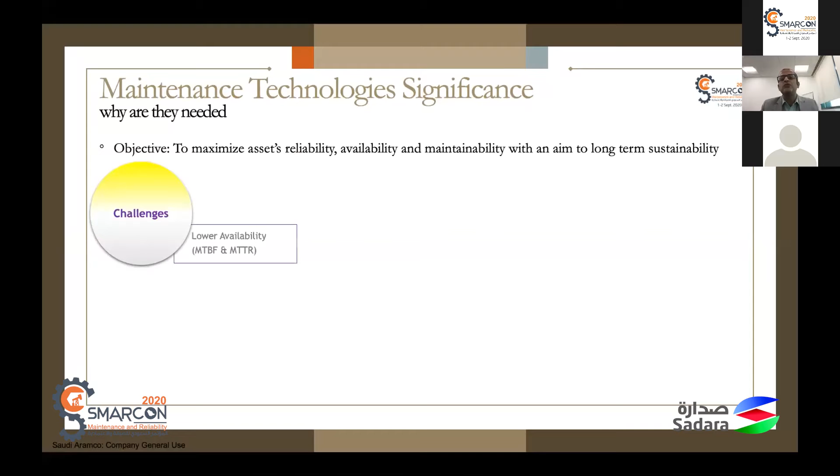That being said, what is the driver behind realizing that objective? We should think about the high-level challenges that can exist. There are plenty of maintenance challenges as we speak, but just to initiate our thought process, I have listed a few of the major challenges, however not limited to, as shown in the slide.

The challenges can include lower availability. Availability is a factor of mean time between failure and mean time to repair. In earlier presentations, Dr. Mishari and the presentation just before me, Mr. Nazi, specifically touched on the importance of MTBF and mean time to repair - closely connected with the response time Mr. Nazi was describing. Mean time between failure was beautifully explained by Dr. Mishari, an expert with more than 30 years of experience. Lower availability is one of the prime challenges when it comes to the significance of maintenance technologies deployment.

Higher maintenance expenditure is another prime factor that draws our attention - how to decrease maintenance expenditure as a challenge and pain point. When we talk about master data governance, yesterday one of our gentlemen discussed master data and taxonomy - how to keep record keeping and equipment history intact. That is also a pain point for many maintenance engineers like us. Last but not least, knowledge transfer and experience sharing is one of the pain points.

Dear team, I would like to share a figure. When we did a study recently within our own country, we found that almost more than 50% of the workforce is less than 30 years of age - meaning they have fewer years of experience - while the majority of the remaining chunk are aged 50 plus. When they are on the verge of retiring, there would be a big knowledge gap. This is a major challenge we are going to face in the near future.

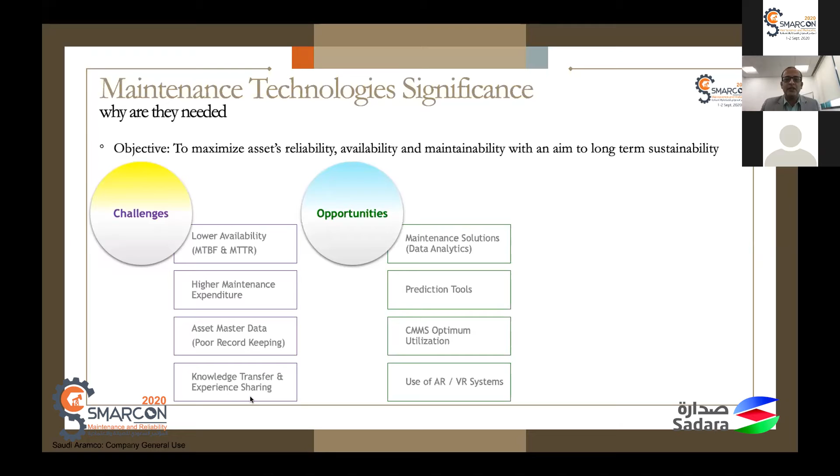The third opportunity can be optimum utilization of CMMS systems - for that matter, SAP, Infor, Maximo, etc. When we discussed the opportunity of CMMS utilization, another opportunity is utilization of augmented reality and virtual reality systems. This AR and VR system is a perfect epitome of success when it comes to mitigating knowledge transfer and experience sharing.

After giving thought to the challenges and available opportunities, our focus moves into scope and focus areas where we can adopt those maintenance technologies. First and foremost can be maintenance reliability tools and systems - it can be T&I optimization technologies, turnarounds, asset management systems, predictive analytic tools, failure diagnostic tools, and last but not least, knowledge transfer and data management systems.

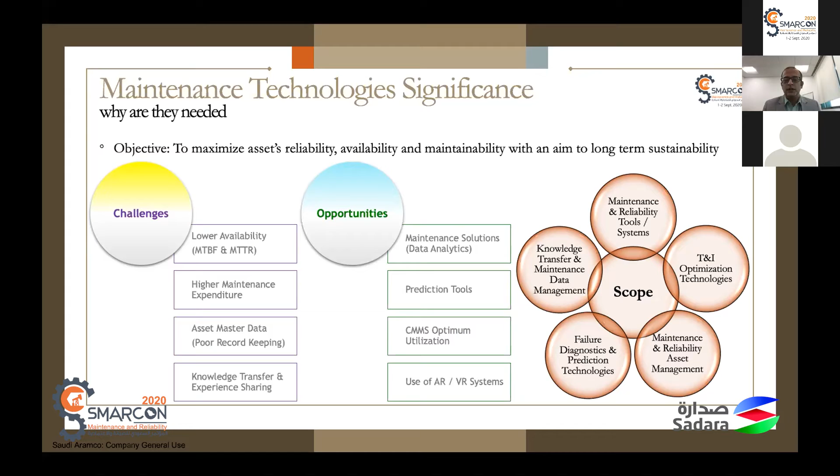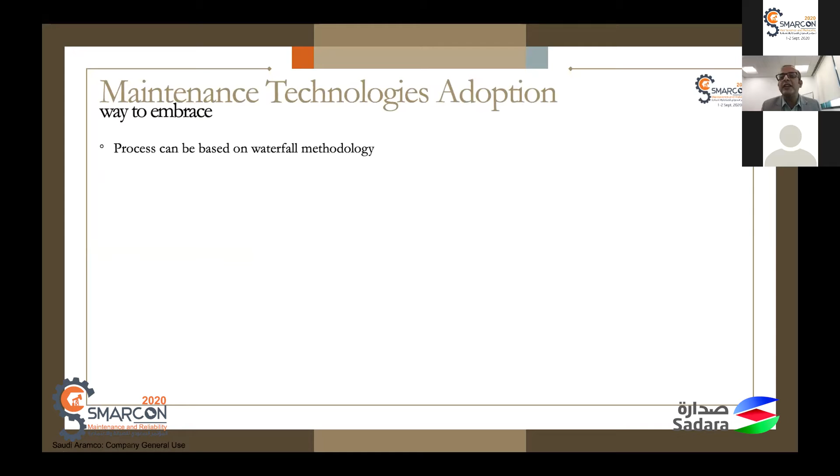After we have come up with the scope of areas, we need to know the ways we have to embrace which can lead to maintenance technologies adoption. The process can be based on waterfall methodology. The first step would be identification of the maintenance challenge.

Once we have identified the challenge, we need to scout for solutions. Solutions can be anything: a cultural improvement step, a best practice improvement, or technology can also be a mitigation measure to address that particular challenge.

Once we come across a particular technology as a solution, we need to do a pilot or proof of concept, to check whether the applicability is correct and we are getting the correct ROI. Once the pilot is successful, we need to adopt it as a long-term strategy, that is, it has to be deployed further.

With this process, based on waterfall methodology, we are sure that we are going to increase our productivity, enhance reliability, improve profitability, and last but not least, safety would be there in all these steps taken forward.

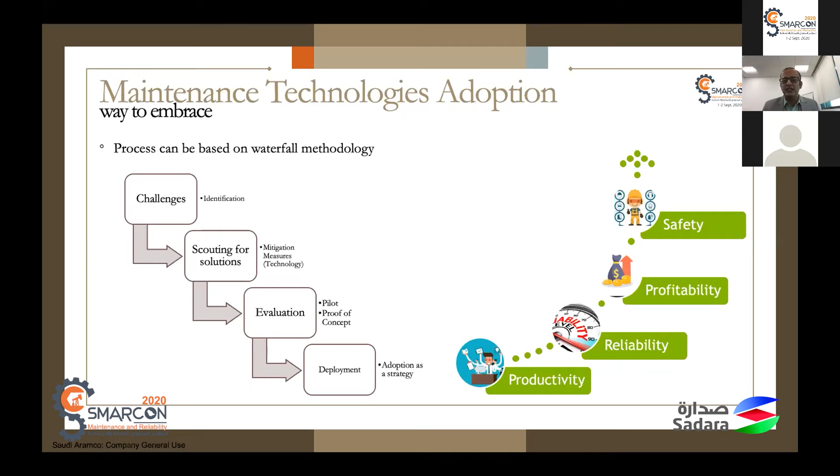Building on this, for an example, we have taken a rotating machinery, say a pump. What can be the challenges, so that we can start the thinking? Challenges can be many. As a high level challenge, it can be a reliability issue: lower equipment availability, lower mean time between failure, higher mean time to repair, and so forth.

Another maintenance challenge can be high maintenance expenditure, due to high MTTR or reactive maintenance. On a high level, knowledge gaps can also be a challenge: operational issues, maintainability issues, experience sharing issues. So these are the high level challenges, say for a pump.

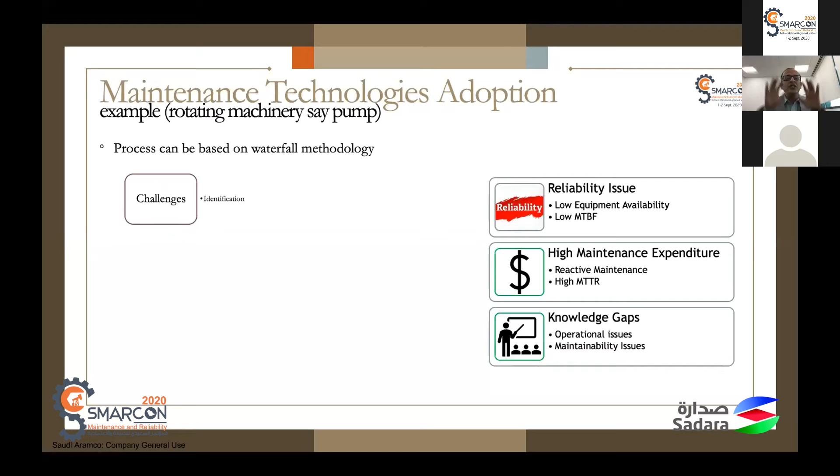How do we go about mitigating this challenge? There can be a number of solutions: it can be a maintenance technology, operational and maintenance best practices, or culture improvement. If we see a maintenance technology as a mitigation method, we need to evaluate, pilot or proof of concept, and then deploy it. Deployment means we are adopting it as a long-term strategy.

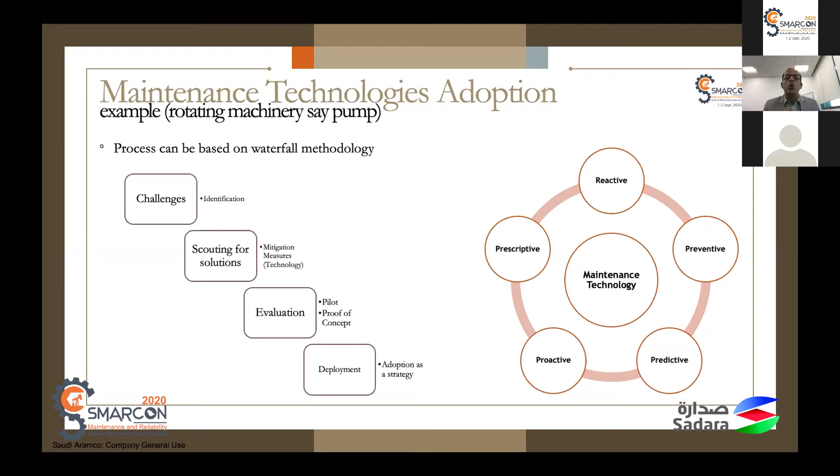Those maintenance technologies can be formed under 5 different types. When we talk about these 5 maintenance technologies, I mean the classification we broadly use, however not limited to, this is a very high level classification.

The primary classification is driven based on the industrial revolution stages. We started with industrial revolution 1, which was a steam driven engine. So from IR 1.0, we are today at IR 4.0. The primary classification is into 5 types of maintenance approaches. The first approach was very primitive, which is the reactive maintenance approach.

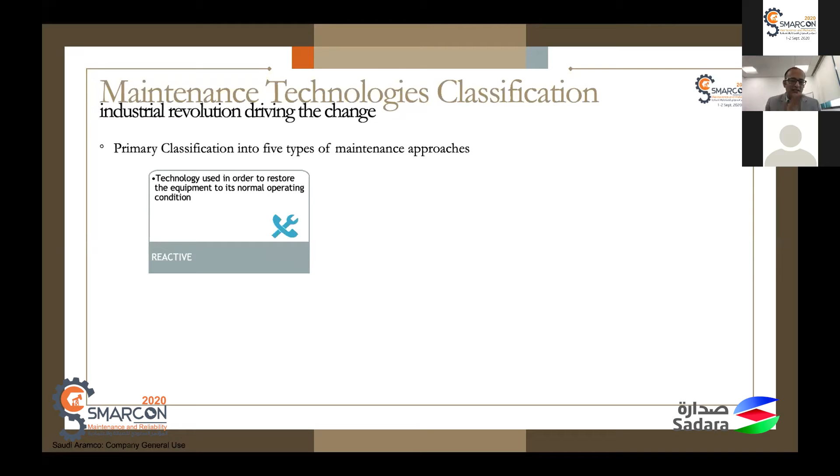Reactive technology can be considered as a tool used in order to restore the equipment into its normal operating condition. That is to say, equipment has gone into breakdown, and we are applying that tool or system or technology to restore it to its normal operating conditions.

The second classification type after reactive comes preventive. That being said, preventive technology or system means it is being used to maintain that equipment while the equipment is in a working condition.

I would like to share an important finding according to a study by the Office of Energy Efficiency and Renewable Energy organization: 12 to 18% of savings over reactive strategy can be achieved if we are managing our preventive technologies effectively. Such a huge impact of preventive maintenance. So we have gone from reactive approach to preventive approach. However, in later slides I will tell you we should have the right mix, but first of all, this approach has shifted now from reactive to preventive.

The next approach, I would like you to guess, is the predictive approach. Predictive approach or predictive technology can be a technique to predict a future failure point. I would like to take your attention towards the potential failure curve, called the PF curve. The PF curve has a point where failure starts, a kickstart point, and then after a certain time elapses, the equipment fails. So if we come to know with some predictive technique about the failure point that has started, we can elongate the time between the failure start point and the actual failure of that equipment.

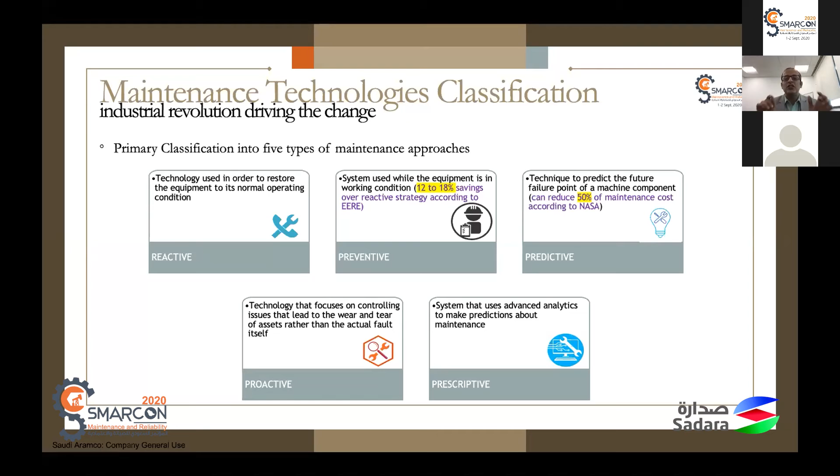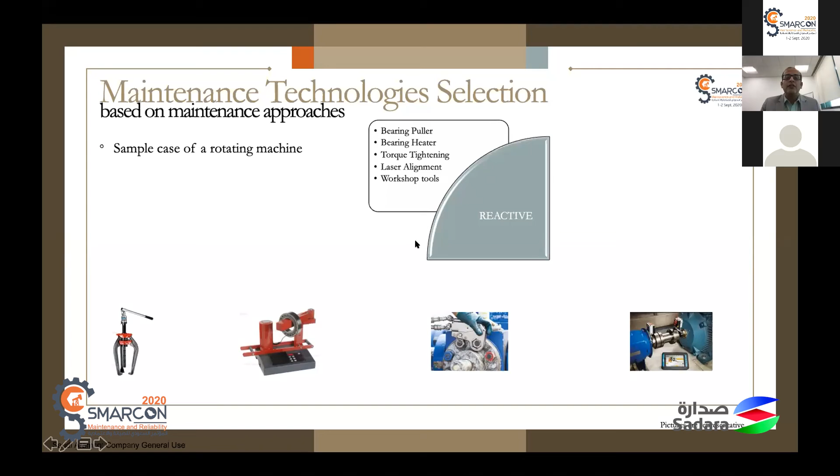We go into the second step: preventive or predictive maintenance. It can be use of thermography, IR, vibration monitoring, noise detection, acoustic cleaning. These are predictive or preventive maintenance technologies. We go further, deep diving into proactive maintenance technologies. As we saw in the previous slide, it can be asset performance management, comprehensive lubrication analysis, FRACAS, RCM technique, which can be part of proactive maintenance technologies.

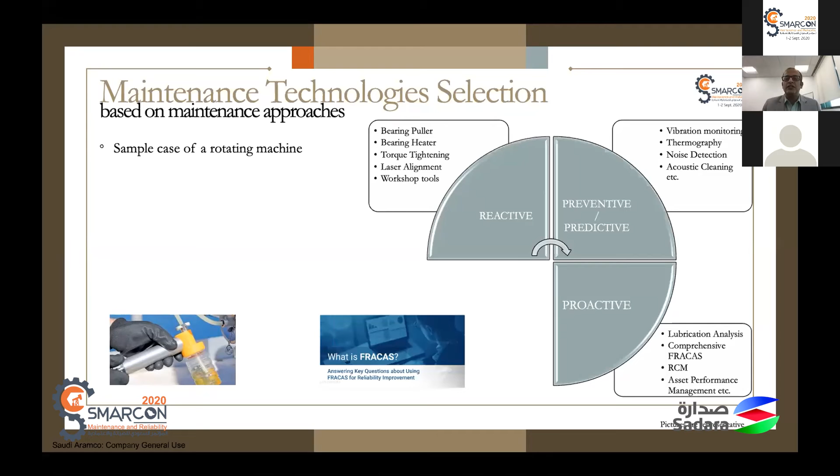As we speak about prescriptive maintenance technology, which fits very pertinently into the IR 4.0 theme, our digital transformation era, we have so many techniques for data analytics. Name it and we have it: machine learning, cloud computing, big data, use of augmented reality, mixed reality, virtual reality systems. I, as a maintenance professional, would like to give you a heads up about what techniques we can use as maintenance technology.

Using RPA, that is robotic process automation, or chatbots, this is going to reduce the time spent on repetitive maintenance activities. Use of operational analytics, developed utilizing DevOps, mobility apps, to optimize our maintenance processes. One aspect is use of robots, UAVs.

Additive manufacturing is one of the key elements coming very soon, utilizing 3D printing for spares management. I still remember in my career of 15 years, my boss used to tell me the best engineer is the one who has control on spares management. This 3D printing will help us mitigate that challenge of spares management. We can reduce the lead time, and prepare items which are not that highly intricate and have a high lead time.

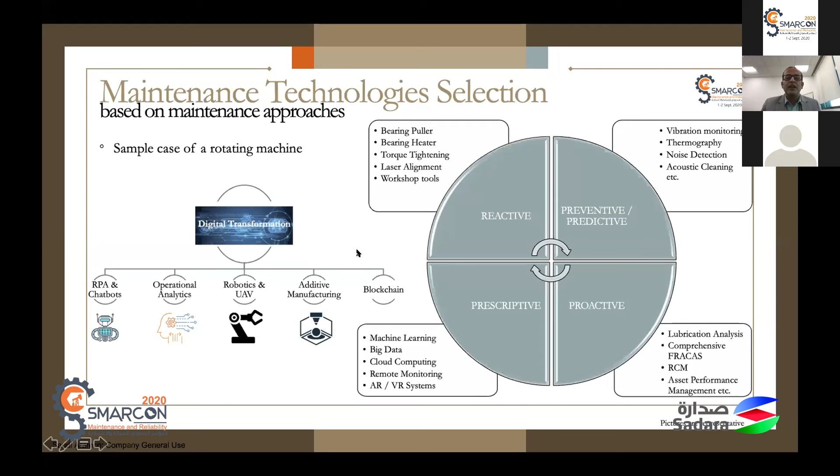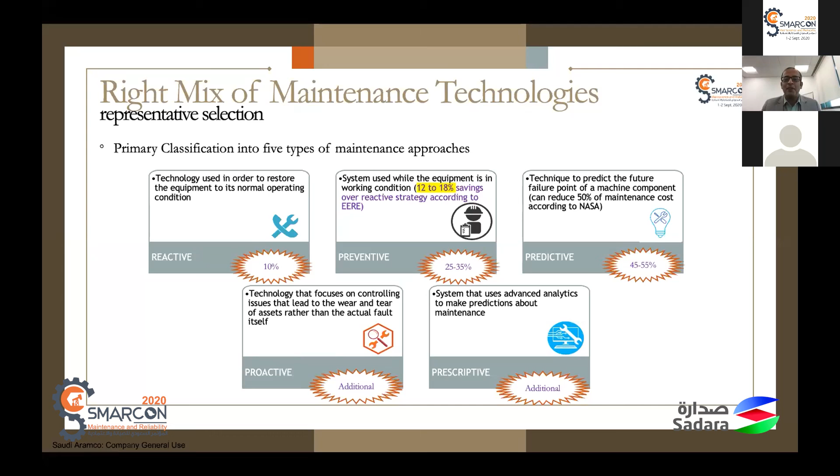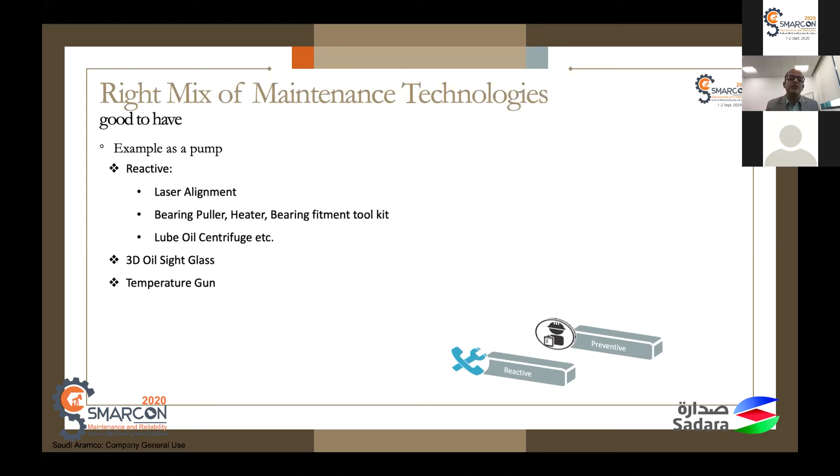After reactive, we go to preventive. Preventive maintenance technologies can be a 3D oil sight glass, which only shows you oil level, clear oil level. Earlier it was 2D oil sight glass, which used to become hazy with foam. So 3D oil sight glass gives you a correct picture whether it is low oil or more oil. 3D oil sight glass can be a preventive tool. Temperature gun can be effectively used by the technicians or the crafts or engineers particularly to monitor as a preventive technology effort.

Going to predictive technologies, for example, as a pump, we can use vibration monitoring, IR thermography as some of the tools good to have for pump predictive maintenance technologies. As proactive maintenance technologies to be used, ultrasound leak detection can be one of them, or lube oil analysis. Comprehensive lube oil analysis can be also one of the proactive technologies which we can use for maintaining a right mix of technologies as a pump.

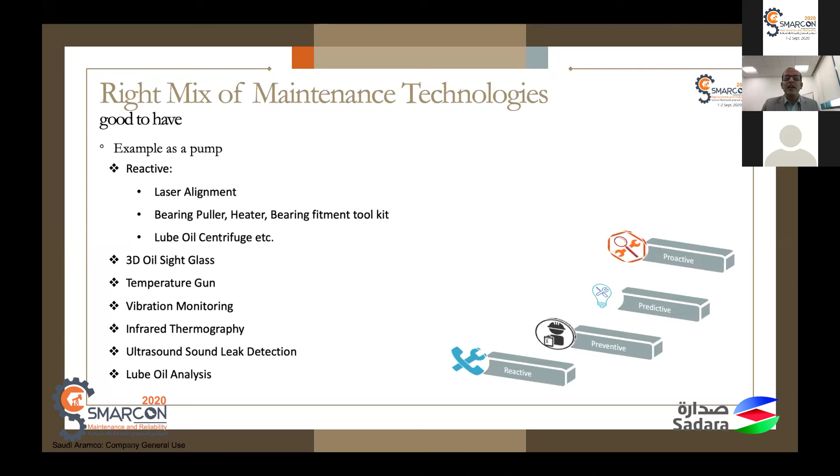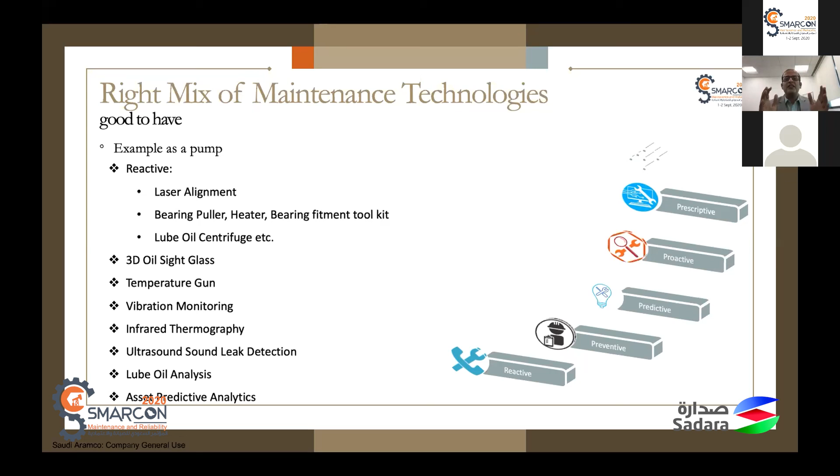Last but not the least, asset predictive analytics, APA, can be used, which uses data, big data, including the operating data, maintenance data, and which can help us predict any future maintenance failure or any future issues which can come up. And we can take action timely and accordingly to mitigate that challenge. So, ladies and gentlemen, these are the go-to technologies, particularly for pumps, which can be categorized into specified classification of maintenance technologies, all 5.

With a quote, I will make the floor open for you to have a thought. I always state that with less maintenance, machinery is available to operate longer. That means with less intervention, with less stops to the machinery, with less manual intervention, machinery is going to operate as long as possible. So thank you very much for your patient hearing.